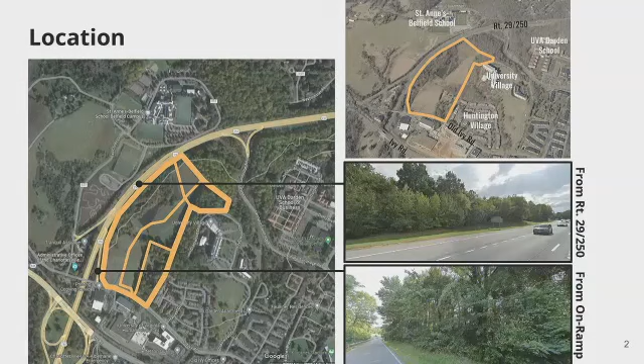The subject property contains 5 parcels predominantly comprised of undeveloped land consisting of wooded and cleared areas, as well as ponds. A 2-story colonial revival residence and associated outbuildings are located near the southeastern edge of the subject property.

East of the site are the Huntington Village townhouse community and the University Village condominiums. South of the site, across Old Ivy Road, are large printing, storage, and distribution buildings that support the University of Virginia. The Route 29-250 bypass and on-ramp are located west of the site. An additional undeveloped wooded area is located north of the site.

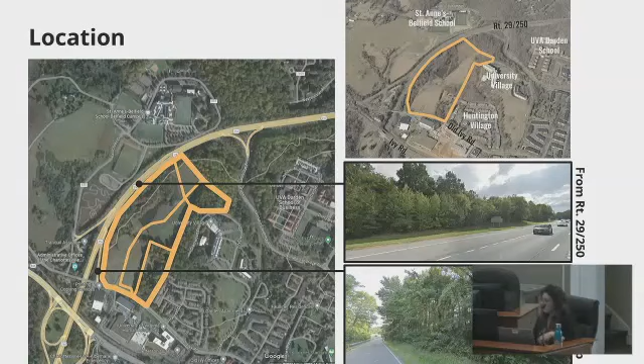The bottom 2 images on the right show different views of the property from the entrance corridor. The middle image is from Route 29-250 looking south from around the middle of the property's entrance corridor frontage. The image to the bottom right is a view from the on-ramp facing north as a driver would, with the property to the right.

The subject property was rezoned to R15 residential earlier this year in March 2023. The map here shows the approved conceptual plan that accompanied the rezoning. In addition to the concept plan, the Board of Supervisors approved proffers, a step back waiver, parking reduction, and a request to rezone preserve steep slopes to managed slopes, allowing grading to occur in those areas.

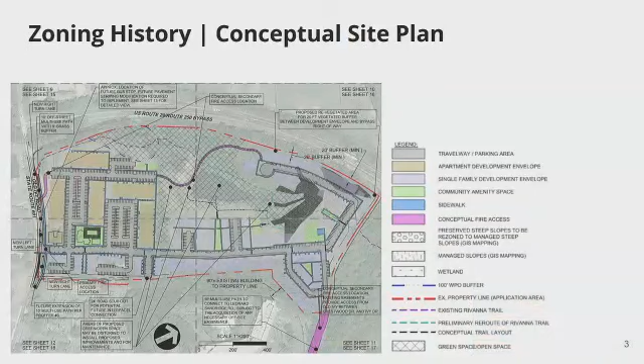The initial site plan submitted by the applicant is consistent with the approved concept plan. North here is located approximately plan right. The development proposes a total of 525 dwelling units on 35.37 acres. Dwelling units include a mix of multifamily, townhouse, and single-family detached residences.

The entrance to the development will be off of Old Ivy Road. No direct access to the development will be located along the Route 29-250 bypass entrance corridor. Open spaces on the property are generally located in the center of the development, around existing ponds and along the entrance corridor, while proposed improvements and buildings are located along other property edges.

The layout shows five 4 to 5 story multifamily buildings located in the southwestern corner of the property along Old Ivy Road and the on-ramp to the entrance corridor. Townhouses are located in about 3 to 4 groupings throughout the development, often mixed among single-family detached units.

The plan does not identify the proposed height of each of the different unit types, only that the proposed maximum building height will be 65 feet. To note, single-family detached units are proposed in multiple locations throughout the site. Although it's convenient to include them on the site plan, they are not subject to the entrance corridor requirements.

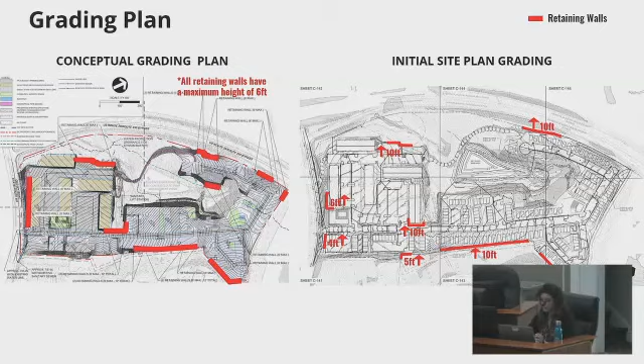As stated in the staff report, architectural designs and a landscaping plan were not submitted with the initial site plan. The initial site plan shows that the proposed development does not have a relationship with the entrance corridor. Buildings are oriented with their backs and sides towards the Route 29-250 bypass.

Retained wooded areas will be approximately 15 to 280 feet wide, but generally 15 feet in areas abutting proposed apartment buildings, which will reduce the visibility of those buildings. The design of the vegetated buffer was not provided with this submission.

The proposed buffers along the EC frontage are consistent with the character of the Route 29-250 bypass. However, more information is needed to understand the extent to which the buffers will limit visibility of the development.

And with that, which pieces of the development will be visible from the corridor, given the combination of landscaping, site grading, retaining walls, and the building heights proposed.

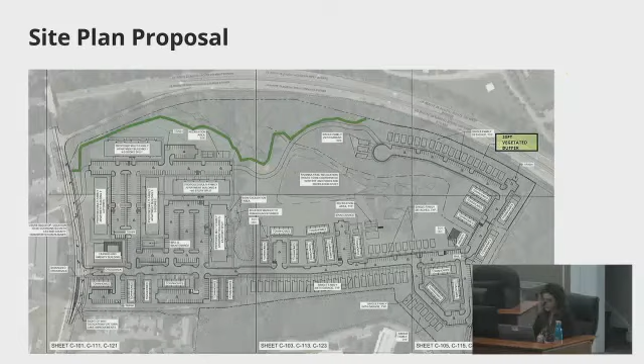Staff recommends approval of the initial site plan and that additional information be submitted so that the ARB can determine visibility and the level of ongoing review. The recommended points of discussion and conditions are provided here.

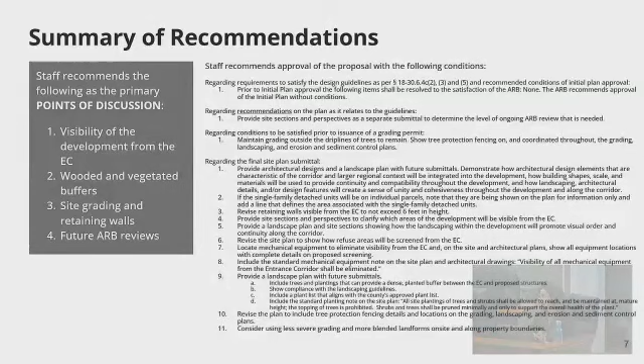Just a clarification on the single family. Are we reviewing single family attached? Is that part of our review? I know this is initial site plan, but just thinking ahead. A lot of the single family is focused adjacent to the entrance corridor. The single family attached, so the townhouses, is part of your review. But if the single family detached are on their individual lots, that's not subject to your review.

Thank you. I don't have any more questions. Frank, do you have any questions?

No, I don't. Thanks, Mariah. That was great. I guess I just have a follow-up question to Frank's question.

So the single family units, if they're on their own lots, are not subject to review. If they're on a larger lot, do they become subject to review or not? They could possibly, depending on the number of units on the parcel, but it would be unlikely that an applicant would present it that way. It's usually just included on a plan like this because it's convenient to show everything in the development, and eventually the parcels would likely be subdivided and would not be subject to your review.

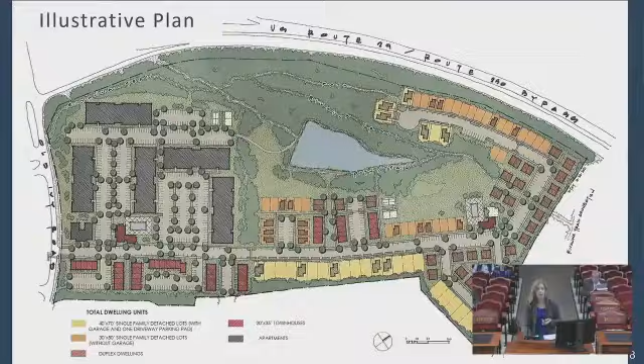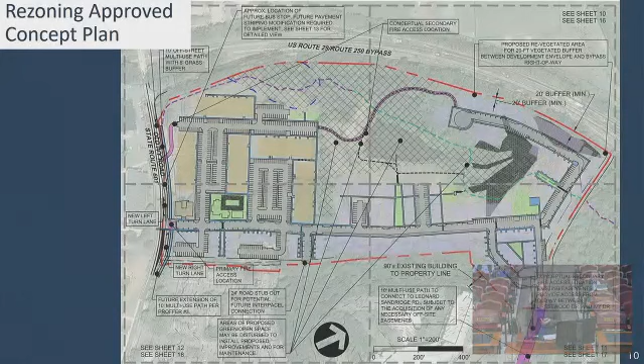This is an illustrative plan we showed during the rezoning process. I like to show this because it demonstrates how consistent the initial site plan is with this plan. And this is just another version of that plan. I'd be happy at any point to come back and go over in more detail all that's here. This is, again, the approved rezoning concept plan. There's a lot of information there, but again, consistent with the layout.

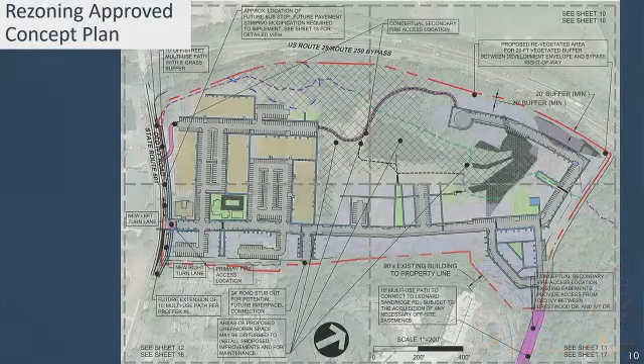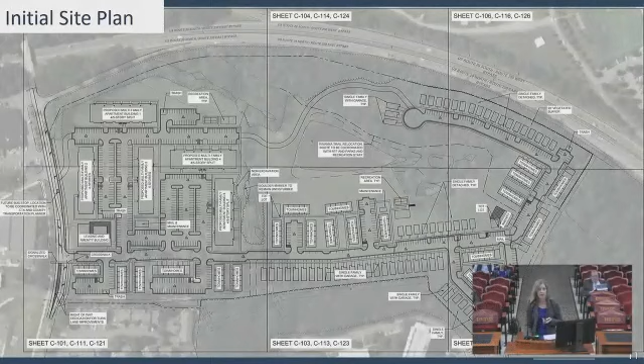The lavender color is single-family detached units, single-family units, some detached and some townhouse, and then the tan is multifamily. And this is, again, the same image that you saw already of the initial site plan, showing all of the different types of units and their location.

A similar image showing sort of the boundaries of the vegetation that will remain. The vegetated buffer area is on the right side. That's shown on the approved zoning plan. That was an important condition of that rezoning, that there be a buffer provided in that area. And then, of course, there's additional planting that will be required, we know, as part of the site plan.

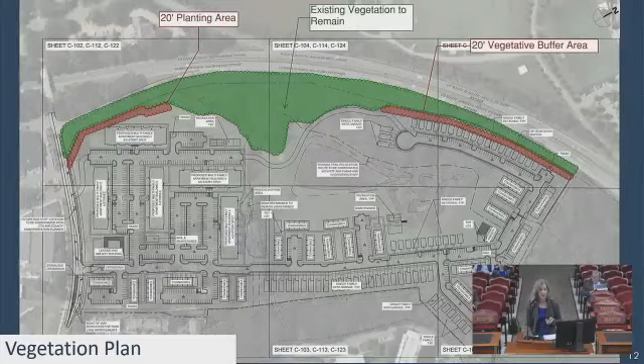So that's everything. I'd be happy to go back to any of these if you have any questions. We did not have any concerns or comments or requests for revisions on any of the issues in the site plan. We do think that the retaining walls, as they were shown, will all be very well screened from the entrance corridor. We're happy to talk about any of those as needed.

Great. All right. Well, thanks a lot for the presentation. Frank Stoner, do you have any questions? No, I don't think so. Thanks. Frank? No, I don't have any questions. Thanks, Valerie. You either? I don't have any questions either. Thank you.

All right. Are there any members of the public who want to make a comment? Do I have anybody on Zoom? No. All right. I don't see a crowd forming at the podium.

ARB will now go into discussion. So Frank Hancock, do you have any comments? Sure. I think it's a nice site plan. I think it's an interesting corridor just because of the speed at which people travel this corridor.

Usually I harp on the buildings fronting the corridor. In this case, I'm glad to see the larger multifamily buildings fronting Old Abbey Road. I think contextually they make more sense there, given the buildings across the street and the buildings in Madison Park.

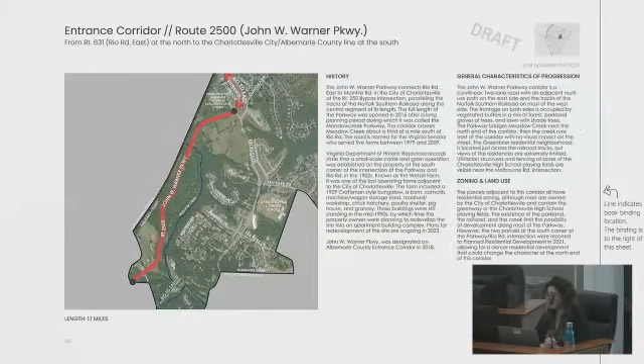Today we have a draft of Route 2500, John W. Warner Parkway for your review. This corridor is relatively short and homogeneous. The corridor is 1.1 miles in length, extending from the intersection of Rio Road East at the north to the city of Charlottesville, Albemarle County line at the south. The corridor is generally a curvilinear two-lane road with an adjacent multi-use path on the east side and train tracks on most of the western side. The frontage on both sides of the entrance corridor is occupied by vegetated buffers and a mix of forest, parkland, groves of trees, and lawns with shade trees.

Some views of the Greenbrier residential neighborhood in the city are found just across the railroad tracks, but these views are limited. Parcels along the corridor are zoned for residential uses, although most are owned by the city of Charlottesville and contain the Greenway or the Charlottesville High School playing fields. Between the parkland, railroad, and creek, the potential for development along most of the parkway is limited, although there could be an opportunity for denser residential development at the northern end of the corridor at the Parkway-Rio Road intersection due to a recent rezoning in 2021.

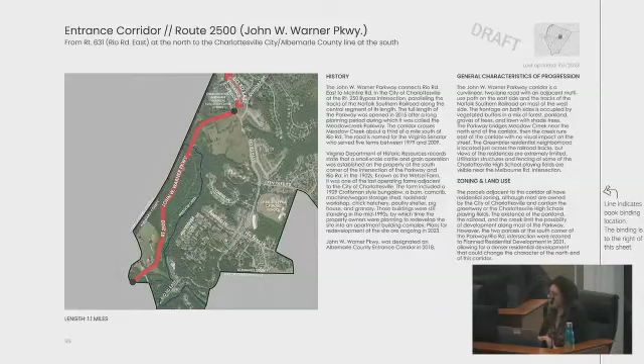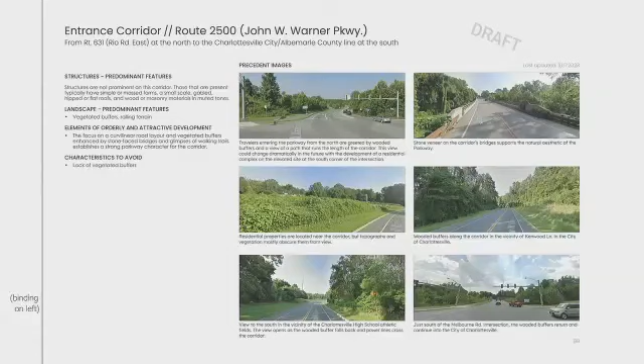As usual, we included a list of predominant structural and landscaping elements, as well as a list of features to maintain and avoid. The precedent images included in the spread generally portray the highly vegetated and strong parkway character of the corridor. Individual images include glimpses of the multi-use path and the incorporation of natural elements such as stone and metal into designed improvements seen along the corridor.

That concludes the information for this corridor. Again, it's short and fairly homogeneous, but I'll navigate back to the first sheet for discussion. All right, well, thanks a lot for that presentation.

Yes, Frank Stoner, do you have any comments? The only question I have is whether there are any additional sites other than the one that just got rezoned in 2021 that could potentially change the character of any portion of the parkway.

The vegetated buffers are pretty dense in areas. I think that question almost needs to look at contour lines as well. The R15 residential area is one that contains playing fields, but that would otherwise be available for denser development. There are some where the creek is located, and you can kind of see where Greenbrier Park on the city side, the creek extends from that green area across the railroad tracks. And so that's kind of where the creek is located.

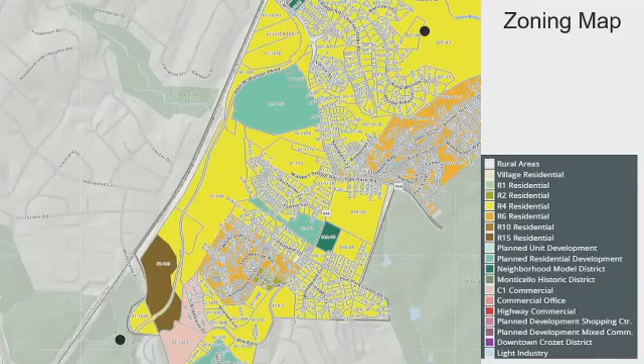At R15 residential at the bottom, the one that's owned by the city of Charlottesville, it contains mostly athletic playing fields that support the high school. We can go back to the aerial if that'd be helpful.